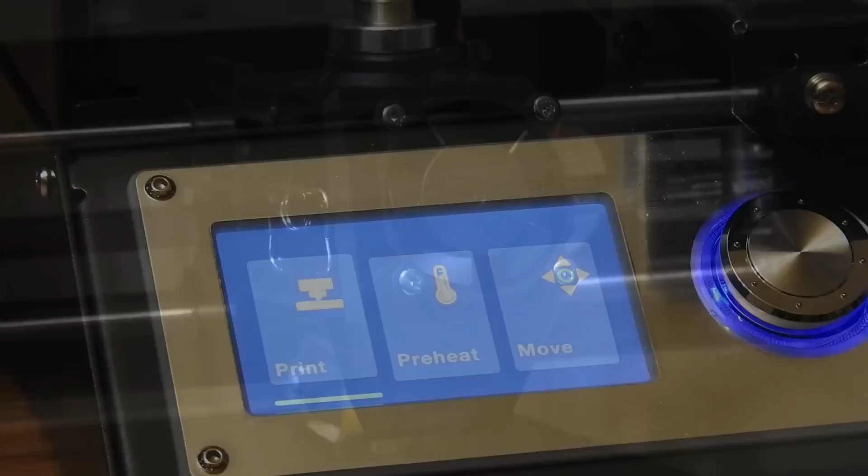So I'm going to talk about how to do a trick in FreeCAD that allows you to print recessed pockets or holes without supports. Now what I'm talking about there is a lot of times in your models, like this little case I made for this CW Flea transmitter, on the bottom I have screw holes and I've got pockets for the screw heads, so they're recessed and they are up out of the way, right?

Well, when you do that, you've got a hole in there that is being laid out over open space within that pocket. There's nothing to support the first loop of that hole, right? And you can do it with supports, which is what most people will do, is they'll print with supports. And then you've got to clean those supports out. That's post-processing that takes extra time.

If you don't, it'll still work. But the first layer or two of that little hole that's trying to be printed in that open space is going to droop down and it can make a mess. Like in these, I'll show you a close-up picture of this. These are two recessed screw head pockets with no support and no special treatment. And you can see when you look at these how the first part of that loop just fell in.

So why am I calling this the Prusa trick? Well, it's because this was originally brought to the attention of the 3D printing community through the STL files that Prusa provides for their printers. They provide all the part files for their printers. It's an open source architecture, which is why I love Prusa and why I bought one.

But they do a trick in there that allows those holes to be printed within that pocket, in open air, without supports. And it was discovered in those STL files by Adam over at Vector 3D. He did a video on it. And then Angus over at Maker's Muse also did a video on it. They kind of showed really briefly on the screen sort of how they did it, but they didn't really go into detail. I went searching for tutorials and I found a couple on Fusion 360, but I haven't found any tutorials on how to do it in FreeCAD. So I'm making one. Let's go to FreeCAD and I'll show you how you do this trick.

So I've created this simple part here. This is a common scenario I'll have where I've got a screw hole and I create a pocket for the head. And let's presume that this is the bottom view. This is the part that's going to be on your printer bed. So you would, in a sense, be trying to print this hole in free space over nothing. So these are our pockets, all right?

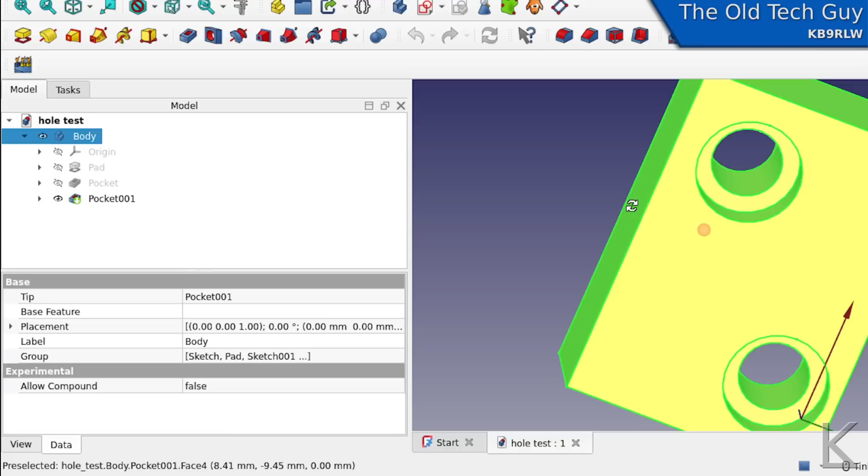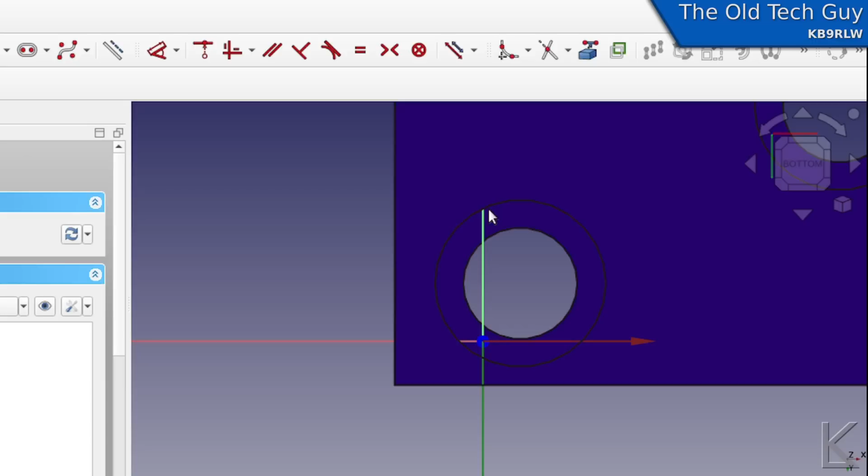So what I'm going to do is select this internal surface here of our pocket, and I'm going to do a sketch on that surface. Now, since we are sketching on a surface that is below the surface of the model, you can see how the axis lines here disappear. We need to turn on View Section, which will generate a cross-sectional view at the surface we're sketching at. It's this icon here, View Section, or you can go to the Sketch menu and select View Section here.

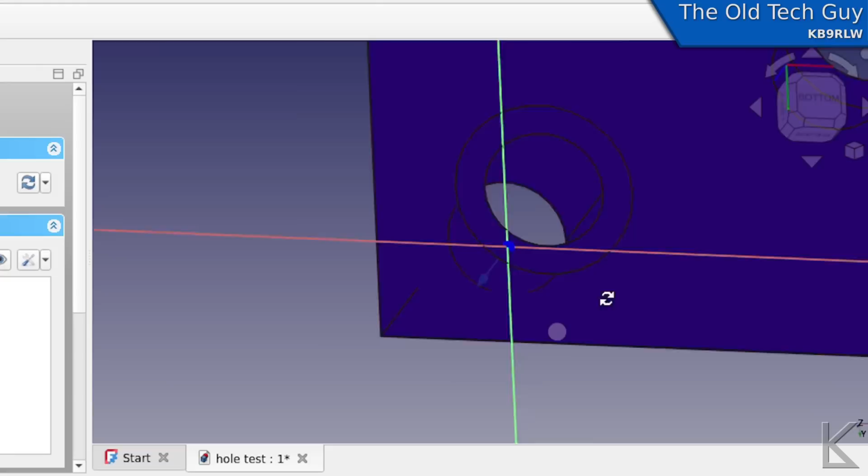And when I turn that on, now we can see our sketch. We're looking at a cross-sectional view right down to that surface where we are sketching. And then I'm going to import some geometry with this Create External Geometry tool. I'm going to import our little circle from our small hole on both of these, so I have this center point to reference. I'll right-click to cancel the tool. And we'll come over here and we're going to select a centered rectangle.

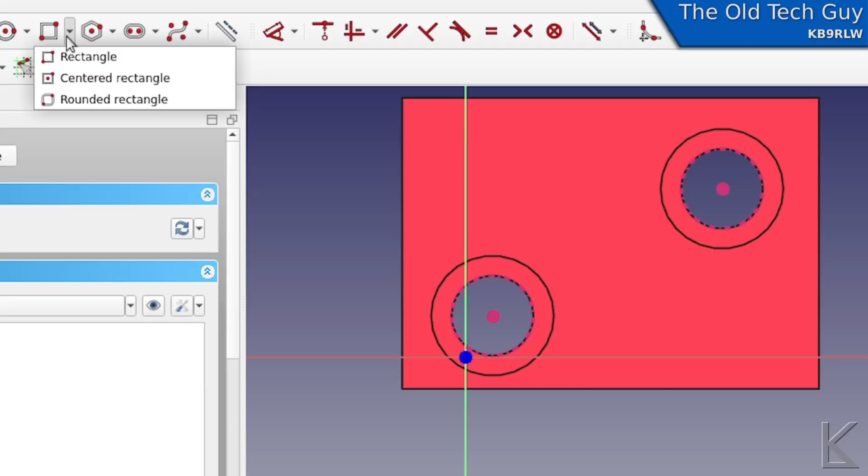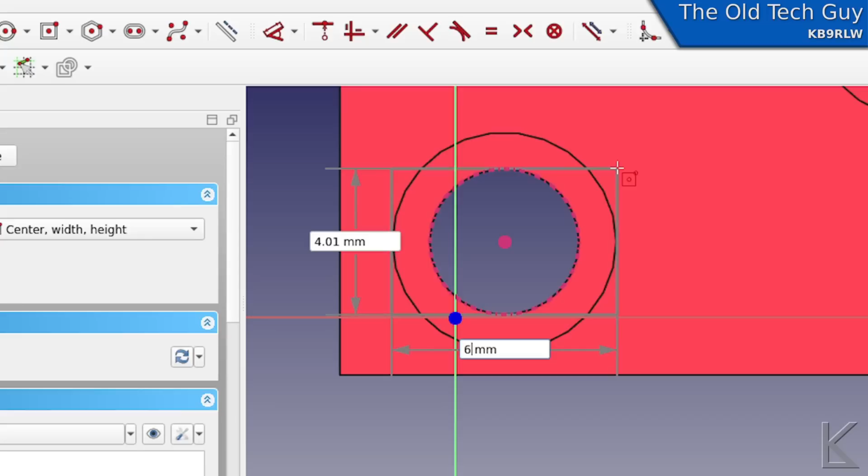All right. Now we're going to make a rectangle that is as wide as our pocket and as tall as our inner circle. Okay. So my inner hole is 4 millimeters and my pocket is 6 millimeters. So I'm going to set those dimensions to match 6 and 4. And I'm going to do it on this other pocket as well. We've got multiple screw holes. We would do this with each of these, right? So we'll just do the same thing. We'll just set this to 6 and 4.

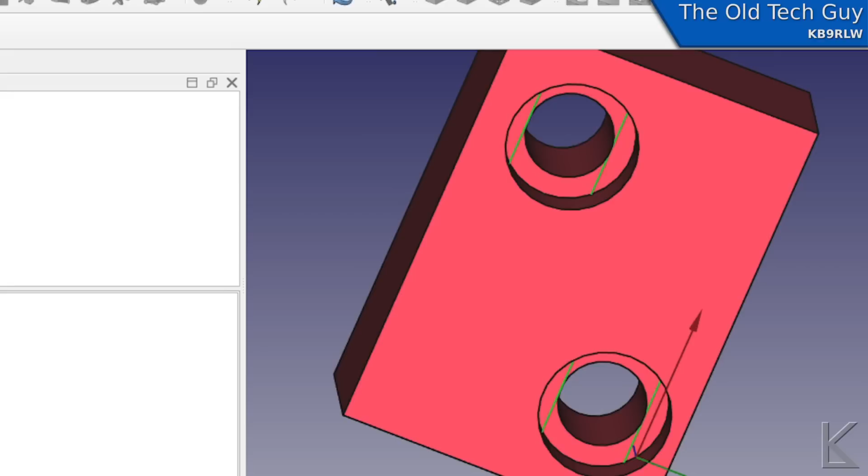I'll close that sketch. Now I'm going to pocket that rectangle one layer, or 0.2 millimeters. All right, so I'll hit pocket, and you can see it cut that rectangle all the way through, but I'm going to set the dimension to 0.2. So that's basically one layer when we're printing at 0.2 millimeter layer height. All right.

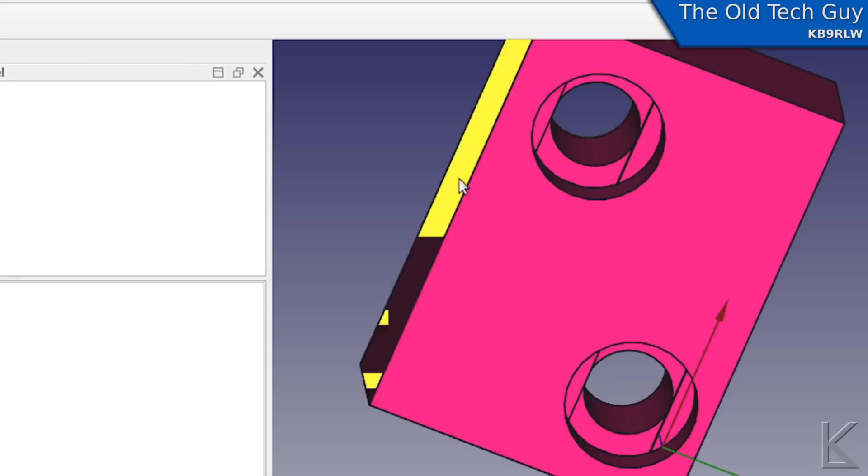Now I'm going to do it again. I'm going to create a sketch on this recessed surface. Okay, this is the surface that we just pocketed. That's where I'm going to create my sketch.

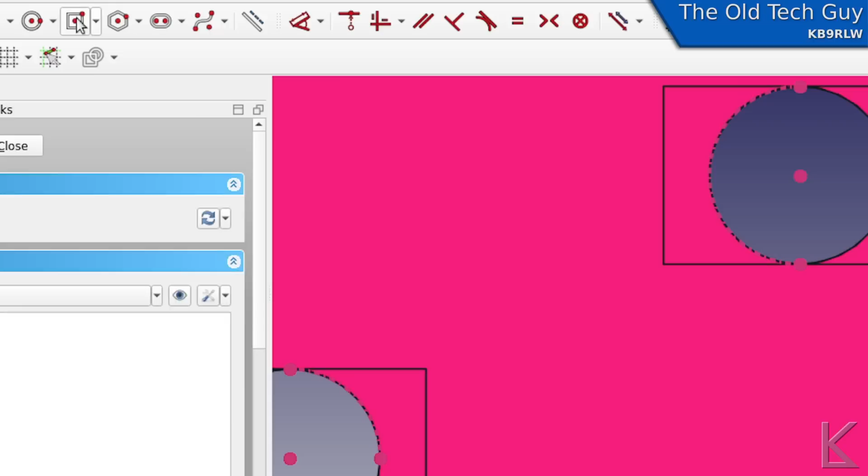And again, I'm going to import the inner circle so I've got that center point. And we're going to do a centered rectangle again. Only this time, we're going to do a square that's exactly the size of our small hole. So our small hole is 4 millimeters diameter, so we'll do 4 by 4. And then over here, we'll do the same thing. 4 by 4. All right?

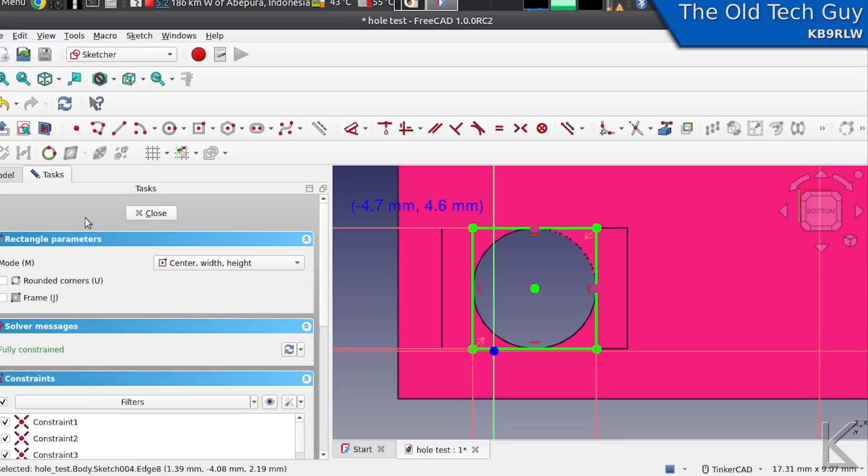I'll close, and then I'm going to do the same thing again. I'm going to pocket that 0.2 of a millimeter. Pocket. 0.2. One layer. Okay, that's the structure. What's going to happen when we slice this is the printer is going to bridge these areas. And it can bridge really well.

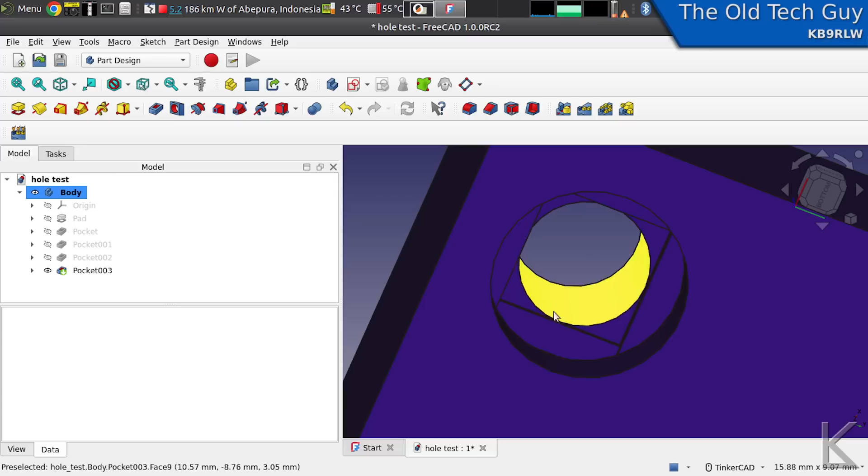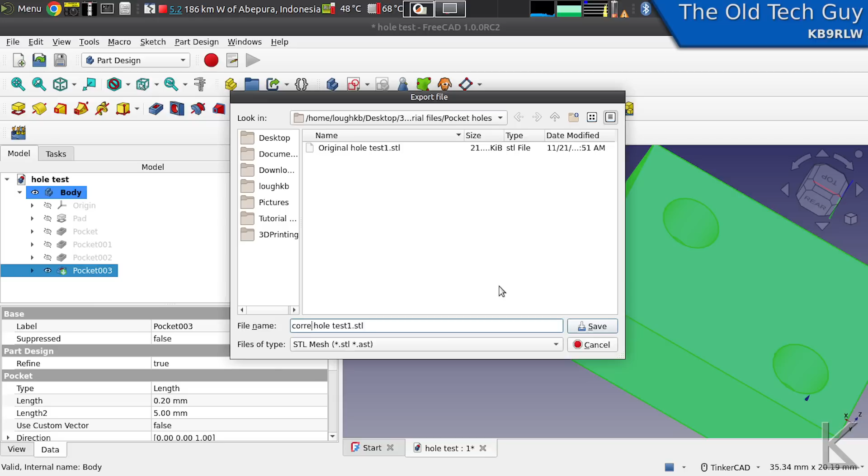So when it goes to draw that circle, the circle is going to have an attachment at each side to that bridge. And this little part here is going to probably bridge fine, this little arc. There might be just a tiny bit of droop here, but it's gonna work. And these pockets are going to be clean. So I will now export this. Export. And we'll call this corrected hole test.

Save. Okay, I'm going to print both of these, but let's go over to the slicer and let's see what happens when we slice this guy. Okay, so there's our original one. Next to it, I'm going to import our corrected hole test. Okay, so this is the corrected one, and we'll slice. And now, well, no, this is the corrected one up here.

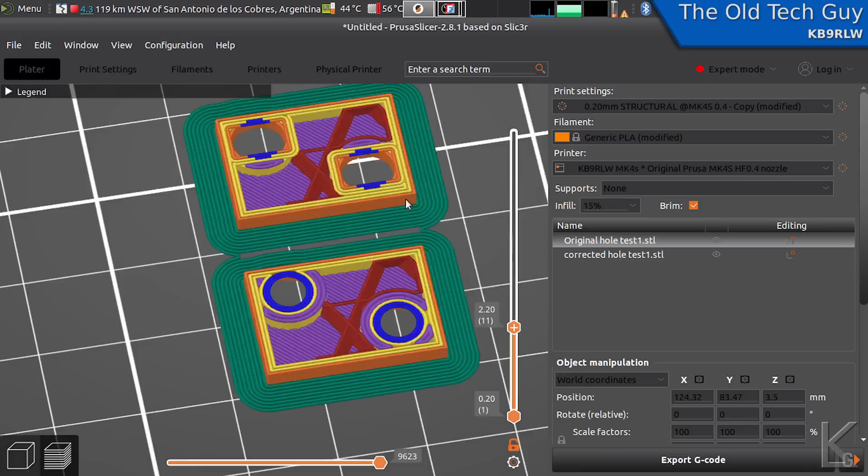What you can see, so we're doing our pockets just fine, but then when we get to that first layer, the original one tries to print this circle in midair. In this one, we're creating bridges across here. And in the next layer, there's our square, and we're creating bridges across here. Whereas this is still trying to print another circle in midair.

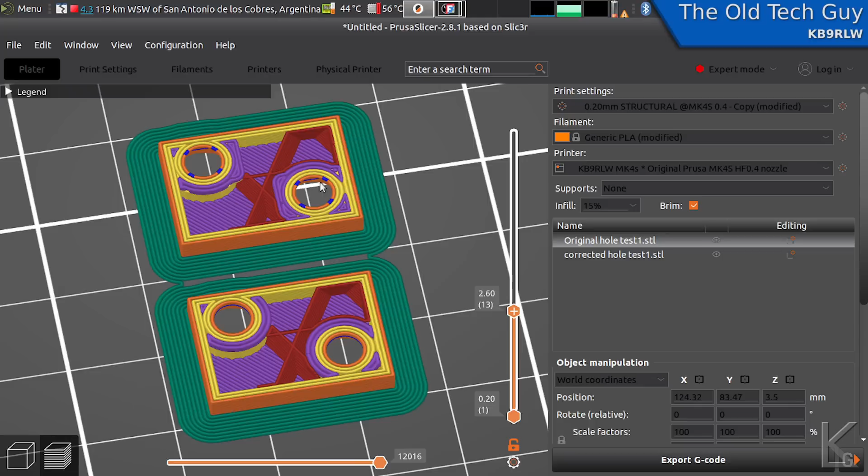And then when we get to the next one, there it's printing the circle, and you can see where it's contacting the bridges. So this is going to print cleanly. So let's go ahead and print these, and then we'll take a look at them. So those are our pockets, and as you can see, it works quite well.

Now, you can do that with larger pockets too. This is a 20 millimeter square, and this is a big hex and a hole in the middle of it. And we're going to do the same thing. This is the bottom view. I'm going to select this inner surface. I'm going to do a new sketch. I'm on the center point, so I've already got the center, but I could import that circle if I needed it.

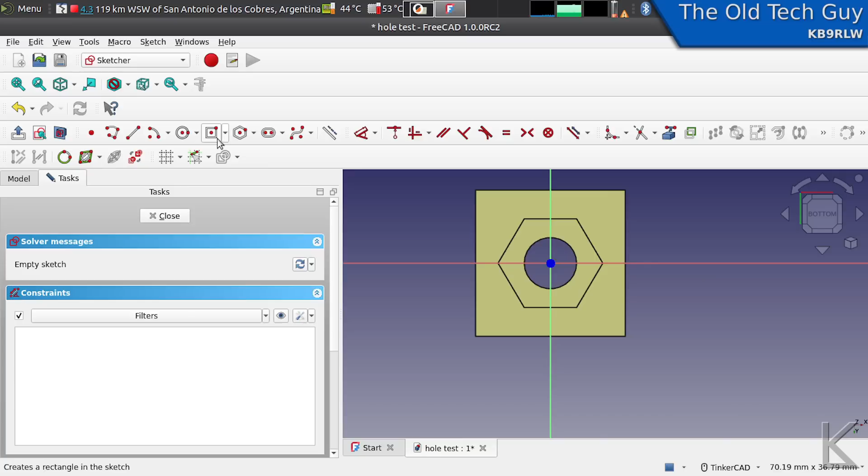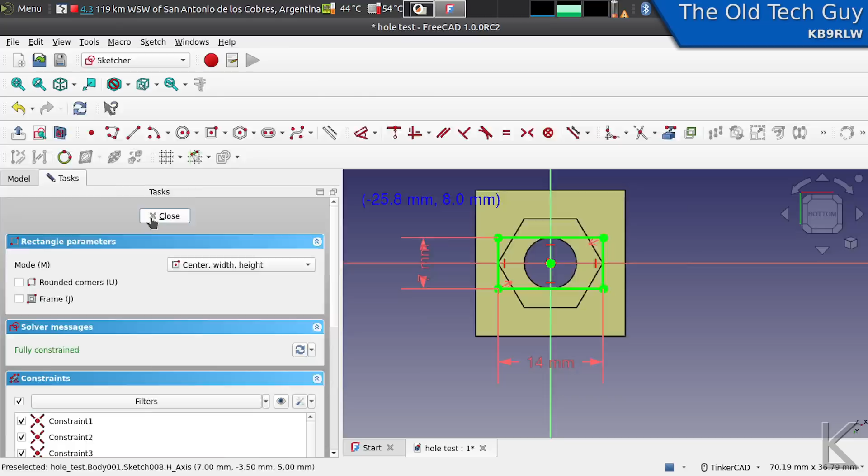And we're going to do a centered rectangle, and just like before, we're going to make it as wide as our pocket and as tall as our hole. So my hole is 7 millimeters. We're about 14 millimeters across on that. Yeah, so we'll go 14 by 7. Close. And we'll pocket that 0.2 of a millimeter, 0.2.

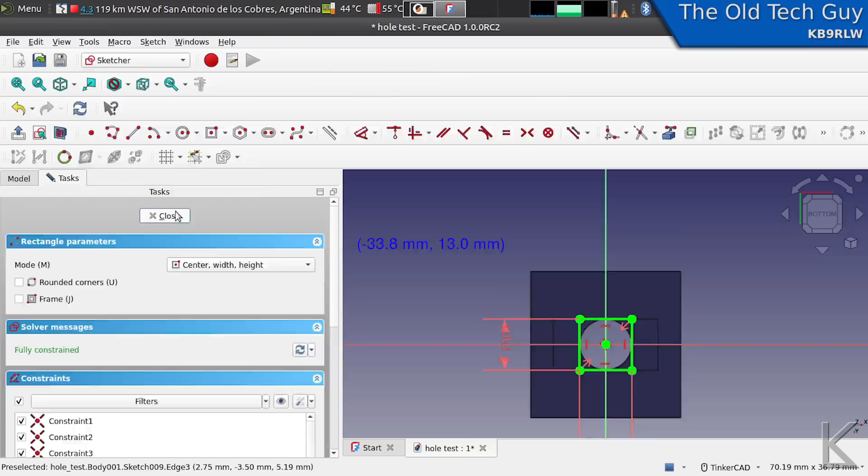And then I'll come in here to this inner surface, and we'll do a new sketch. And again, we'll do a square, and this time the size of our hole. So 7 by 7. Close. And I'll pocket that 0.2 of a millimeter. Same deal. And then we'll export this. And I'll come in here to PrusaSlicer, and we'll import that as well. Put it off to the side, and we'll slice.

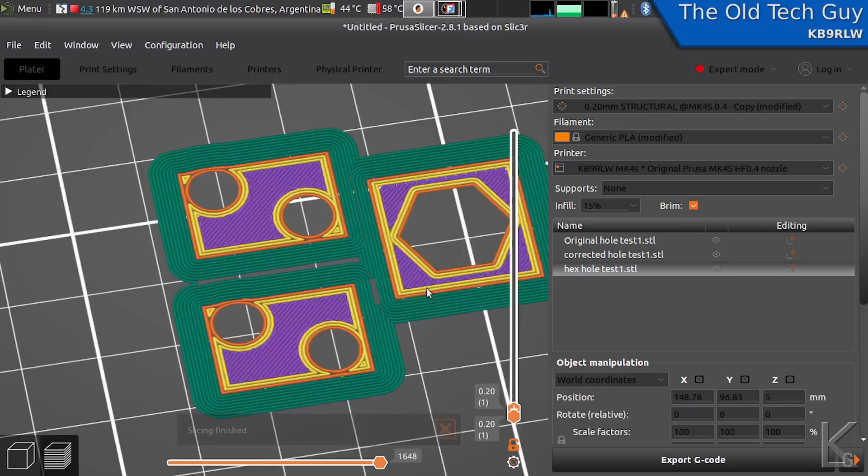And again, if we look, what happens? Yes, I've got a brim turned on because it's cold in here. About 60 degrees Fahrenheit, and printing is tough when it's that cold.

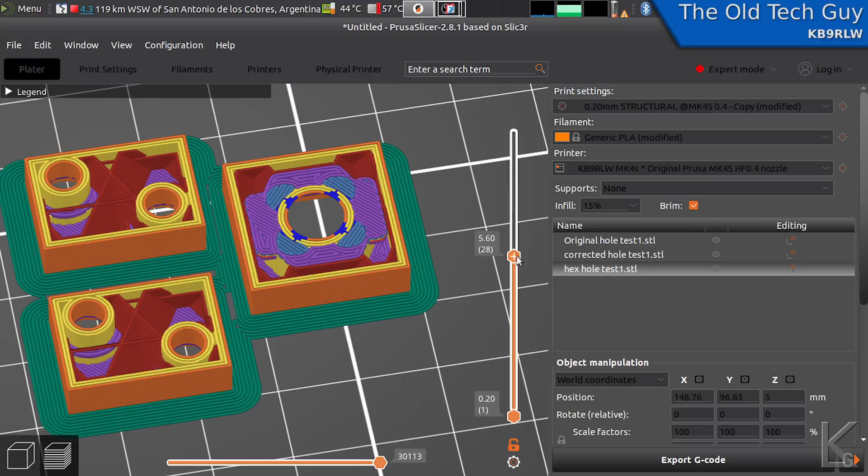There's our pocket. We get up to that first layer of the hole, and where is it? There. And you can see it's bridging across the hex part. And then the square bridge, and then our hole, with a little bit of bridging over here at the corners. So it's going to support that hole just fine.

Pretty neat trick, huh? So there you go. That's how you can make your models not require supports for those pockets. And they can work up to much larger diameter things as well, as we showed. So it's a little extra work. It's an extra step or two that you've got to do to finish the model up. But if it makes your model print without supports, then that just makes it easier for the end user, doesn't it? Or anybody that's printing it.